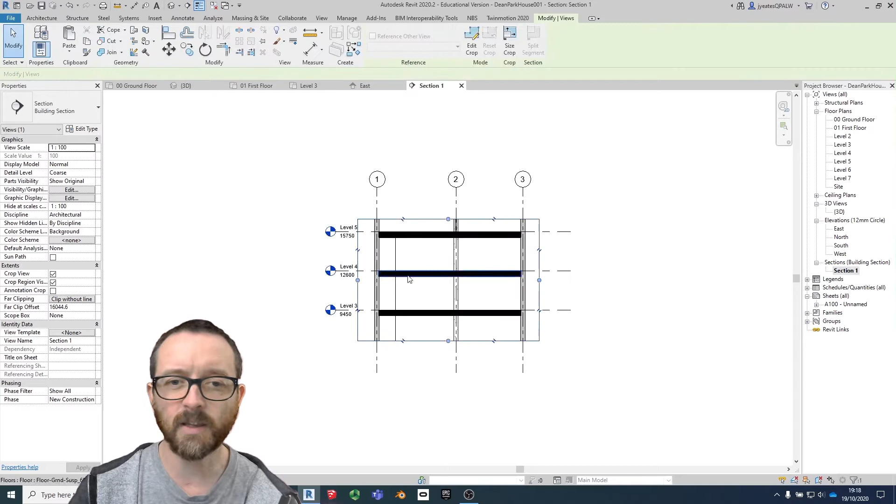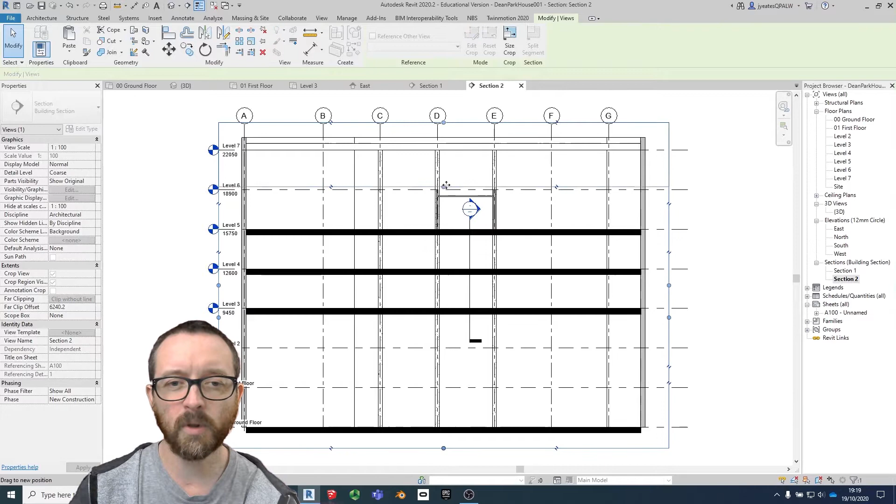Okay, so if we wanted to add a long section, I'll get the section tool again, drag and click. Another thing we can do is we can use this break symbol, and we could have the line crossing over here and over here for our section. Let's check the section. That looks good. Again, we could crop to a particular part of the project. There's our section, looking good.

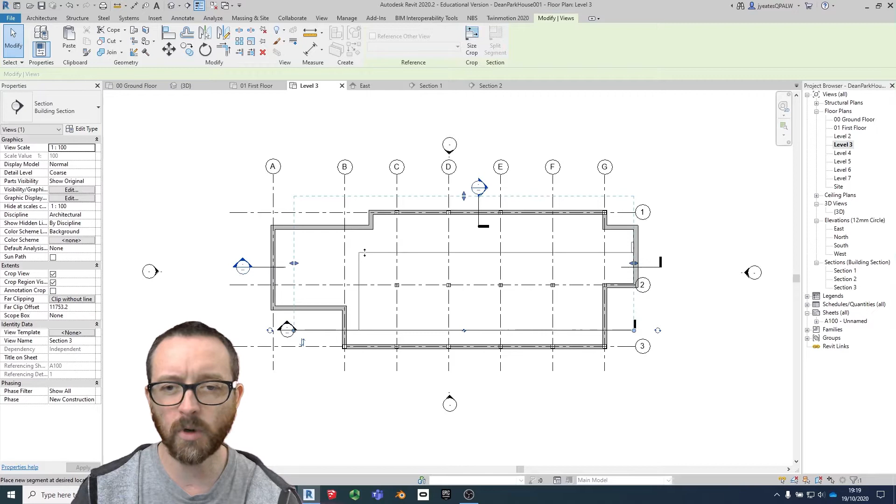Okay, also with sections, you can create sections that crop in different ways. So let's go to View, choose the Section tool, and we can create a section like so, but we can add a split segment, and this will allow us to draw more unusual sections. Now, there was a particular building that we worked on last year and the year before where there was a large courtyard, and sometimes we needed to do a section that went around the courtyard in the center of the building so that we could see the internal sort of flow of the building. So this again could be very useful.

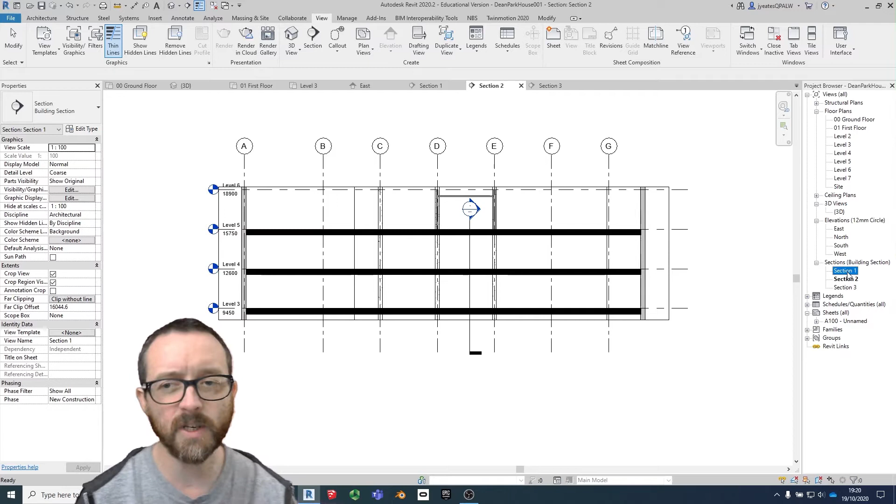So we have 3 sections, ready to go into a sheet. So sheets are built into Revit. We use sheets to create documents that could be printed to scale, and by default you will have one called A100 unnamed. At the moment mine has the ground floor plan in it with the section on it, but if I delete that, you can drag any plan, elevation, 3D view, or section into this.

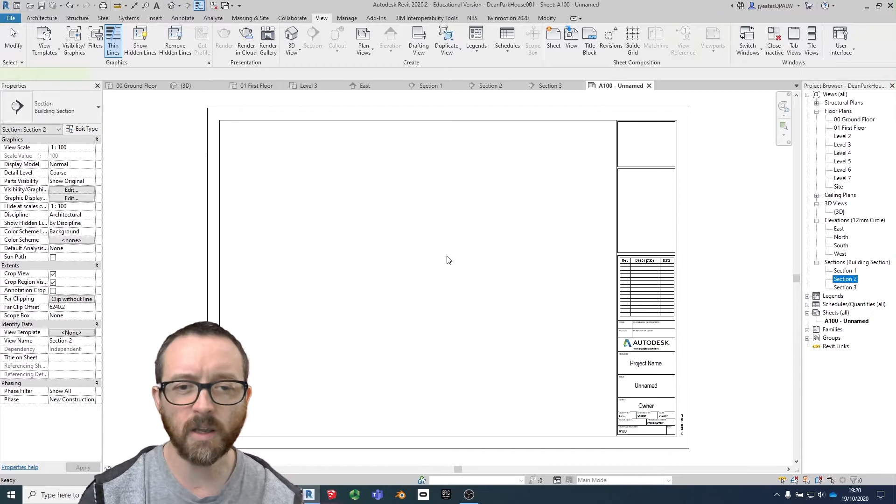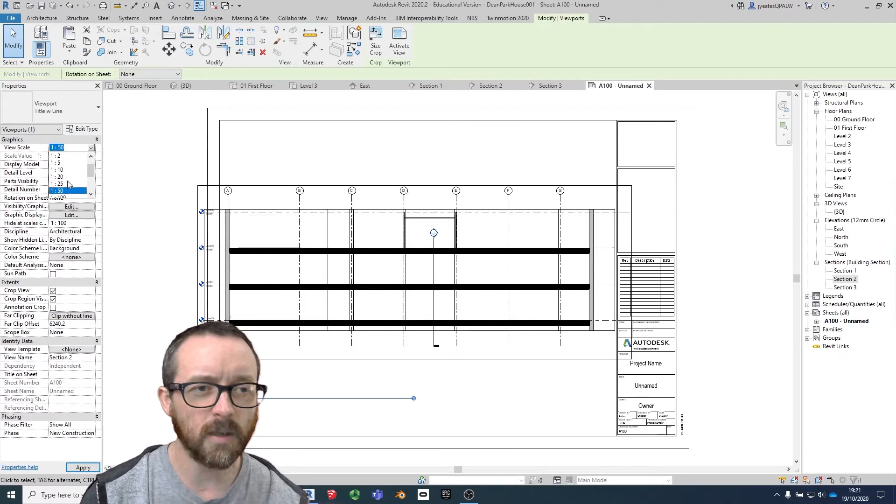So let's drag one of our sections. Let's click and drag, and there is our section. Our long section is inside of this sheet. This is an A1 sheet, and at the moment you can see that the view scale is 1:100. You could increase this if you wanted to. We could go 1:50, and we can see that that doesn't quite fit, so it's probably best to keep it down at 1:100. There we go.

So we could add a couple of sections here. Let's pop that in there, and let's add in this section as well. Okay, so we've got our 3 sections on this sheet, and this sheet is ready to go.

We're going to need some different size sheets for our project. You'll need an A3 one as well, which will help you create scale drawings that can go into your design reports. So to create new sheets, we need to right click on the word Sheets inside the project browser.

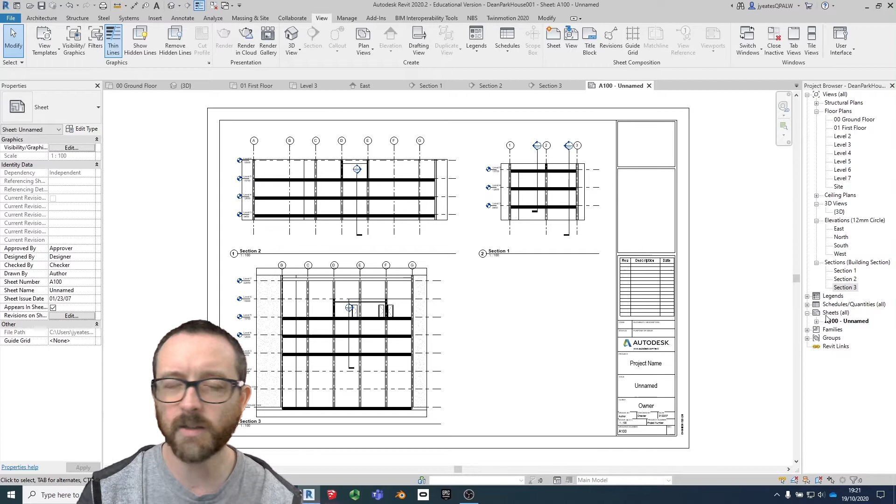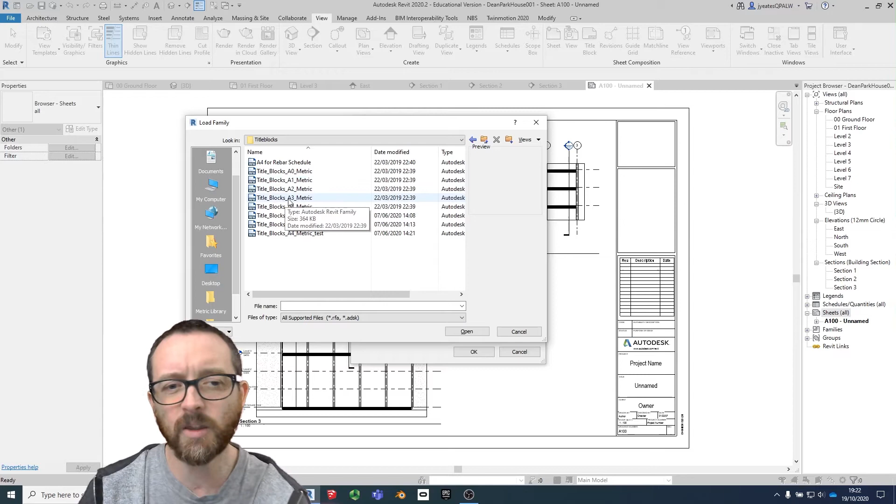Here we choose New Sheet, and we can load a brand new type of sheet. At the moment we have title blocks A1 metric standard, which is the default. If I press Load, it opens up all our content for Revit. Normally you'd see the UK folder open, and near the bottom we have title blocks. Double clicking that shows all the title blocks that come with Revit. The one I'm looking for is the title blocks A3 metric. Click Open, and it adds that to our potential new sheets.

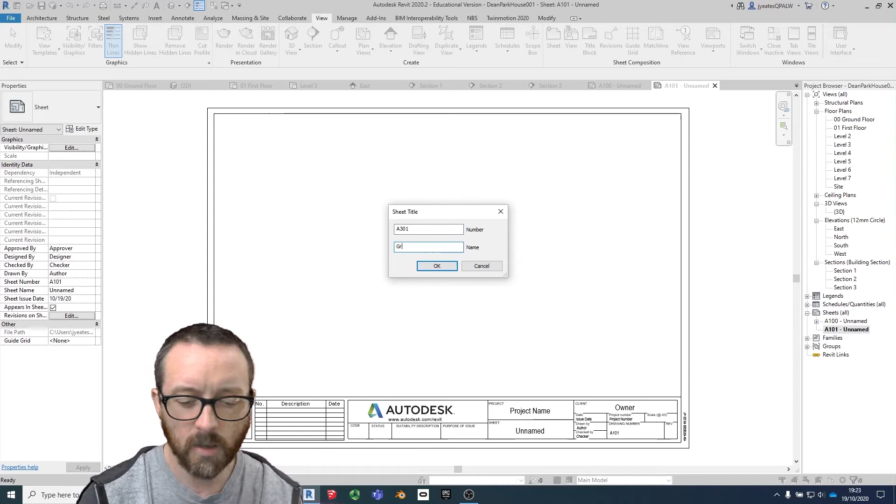Let's click OK, and here we have an A3 sheet. First thing I'm going to do is rename this. I'll right click and choose rename, and I like to refer to the size of the sheet, so I'll say A3. This is going to be A301, and I'll call it Ground Floor.

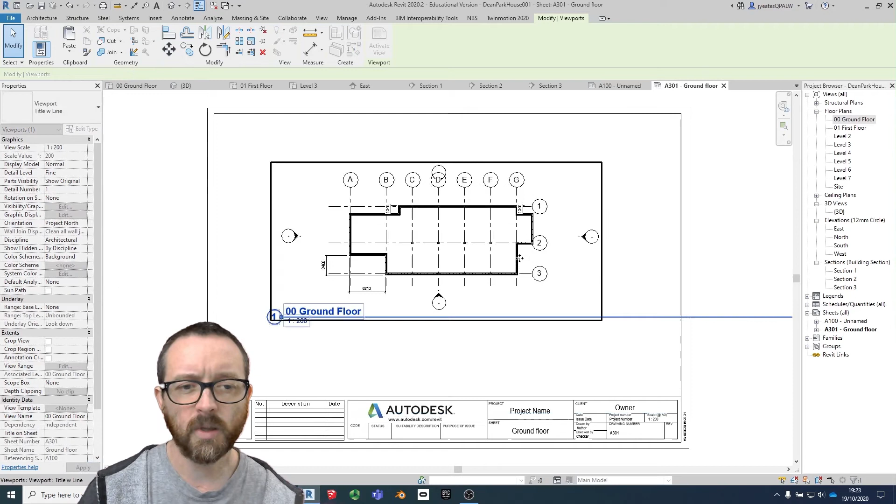Inside here I'm going to put the ground floor plan by clicking and dragging. There's the ground floor plan, and I can rescale this if it's too big, so I might go to 1 to 200. There we go. And if I need to adjust this line, I can just drag that in. Now we have our A3 sheet to scale 1 to 200 of our ground floor plan.

Now once you have your sections and your sheets set up, you're going to want to print them to PDF. Printing to PDF allows you to take that document and use it in lots of different ways, maybe to bring it into your InDesign design report, or to email it to somebody. The PDF is the best way to go, something everybody can access and view. So let's print a PDF.

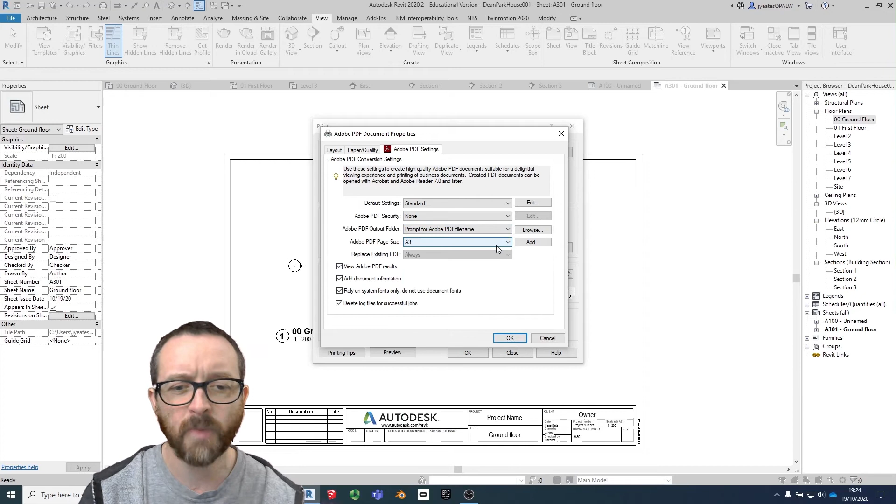What you need to do is go to File, Print. I clicked on Print, and we're going to choose Adobe PDF as the printer. I check the properties to make sure the size of the page matches what we want to print, so I'm choosing A3, and none of these other options I'm going to change. I'm going to print black and white because I'm not too bothered about this logo; everything else is black and white. Layout landscape, yes, click OK.

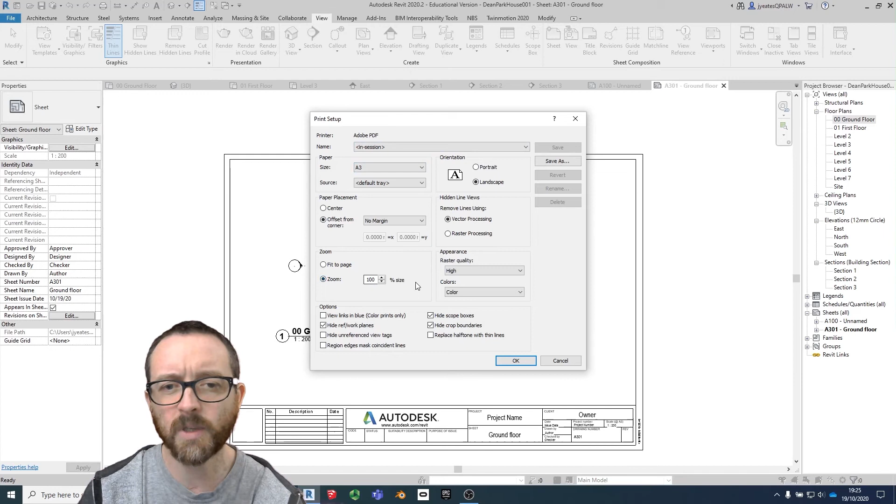Combine multiple files into one - I'm only planning on printing one sheet, so I want to make sure that stays as it is. I'm going into the setup here to make sure this also says A3, with the zoom at 100%. That ensures our scale will be correct. I'm using vector processing, and it is landscape here. That's all good, click OK.

The next thing I want to do is select the particular sheet I want to print. So I'll choose Select Views and Sheets, select here, and down at the bottom-ish - there it is, Sheet A301, Ground Floor. I'll click OK. There's a tick there, click OK. I don't need to save any of this, so I'll click OK and not save.

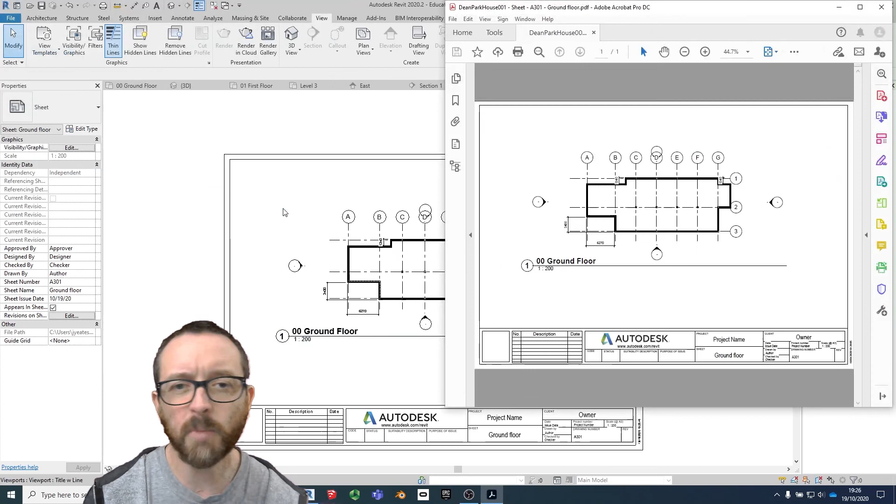Yes, I've chosen to print one view, that's correct, and I'm going to save it inside my documents. Press save, and you can see it builds the PDF for me. Hopefully you can see on my screen that Acrobat DC has opened up, and here is my A3 to scale. If this was printed without any reduction to paper size, printed at 100%, this will be accurate to scale at 1 to 200.

So that's how you create your scale drawings ready for your design reports, or just for printing out for reference. That's how you create these to-scale sheets from Revit. We've gone through drawing sections, modifying those sections, creating sheets, and printing to PDF. Thanks for watching, and I will see you soon.